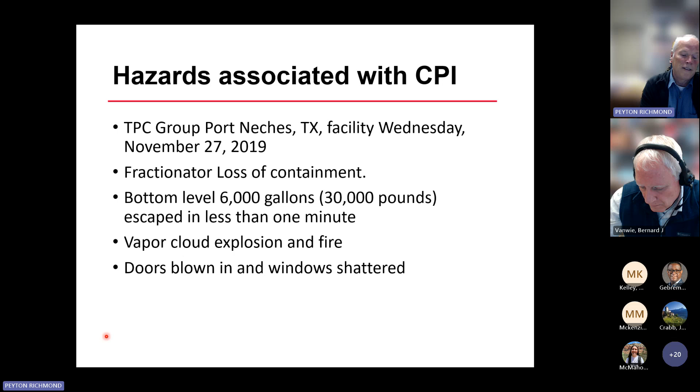That was about 30,000 pounds of 1,3-butadiene - to put that in perspective, that's like about 6,000 pounds of TNT. It vaporized and then exploded. This is not too far from people's houses and high schools and such, so you had doors blown in, windows shattered. When I talk to some people about cybersecurity, they think, 'Oh well, it's a chemical plant, just go close a valve.'

So I thought I'd show you some valves. This is from the Borger refinery. Number one, the question is, can you get to the valve? Do you know which valve you need to shut?

These are just small valves inside the boundary limits of the plant. But whenever you shut down a plant and you're trying to isolate it, you have to shut down the boundary limits valves. These are very large valves. When I was a younger man working as a control engineer, we were shutting down for a turnaround, and I went off with a group of 2 other operators to close one of these valves.

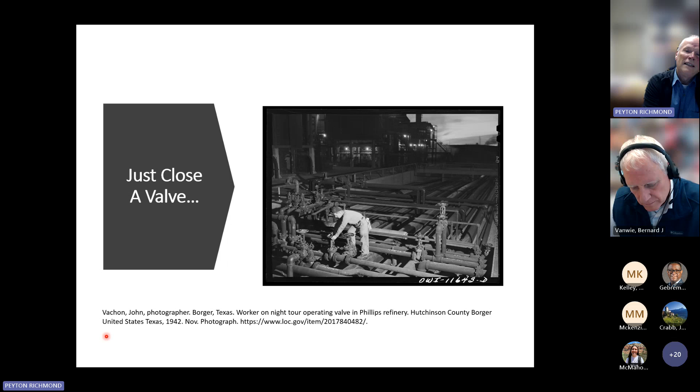So let me tell you, it is an exercise. It takes a significant amount of time and effort to shut these valves, that's assuming you can get to it. In the case of this incident, the piping was so heavily damaged by the explosion that you couldn't even shut the valve. The valves were not there, so you couldn't isolate it. And so the fire kept burning. It's not easy to put those things out.

Before it was over, you had another 2 additional explosions, 4 additional towers fell. All you try to do in those situations is try to contain it. I was evacuated. And you think about it, this happened on the night before Thanksgiving, so everyone in that community, we spent Thanksgiving Day in hotel rooms. And those fires burned for over a month. So that's a significant event there.

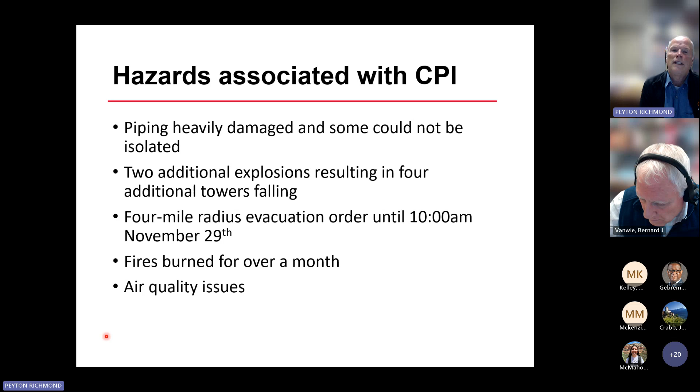And you also have the air quality issues because 1,3-butadiene is not very healthy.

So the hazards associated with CPI, just to summarize then, the worst thing that could happen is you have a loss of containment from the process equipment. And if that happens, then you have the vapor cloud explosion possibility, you have the fire that you can't put out, and then you have the toxic release.

One level down would be if you just have equipment damage, like a vessel or a compressor gets damaged or a furnace gets burned down. That's less likely to hurt someone, but it will shut down a plant for an extended period of time, 3 to 6 months. You're talking about millions and millions of dollars for these large facilities. And then probably the safest thing that could happen if you had an issue was just an unscheduled shutdown. But even that is going to cost you, just $30,000 just to shut down for a small unit even.

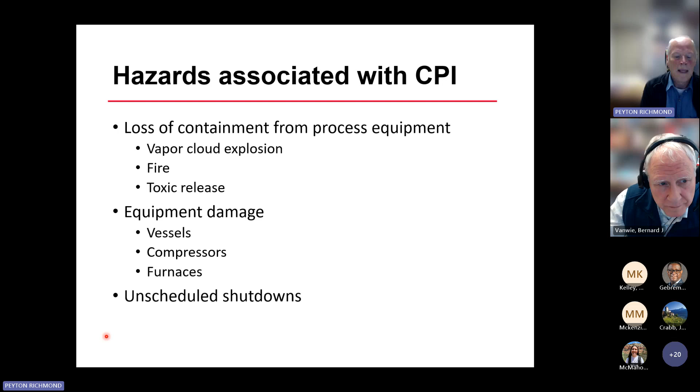So the traditional risk mitigation to try to take care of these problems, because number one, we found that a lot of the fatalities that occurred when these things happened were because you had people located inside the boundary limits of these units, was that we took all non-essential personnel and moved them outside the gates. That was certainly pushed by the insurance agencies to try to do that.

Example there, when I was at the Borger refinery in the 1990s, they cut over from all pneumatic instruments to this DCS and electronics, and they moved all of their control rooms. All their control rooms used to be right underneath the units. They moved all those control rooms outside, next to an old school, outside the gates.

And I say it was an old school because the history was that in 1980, that refinery had a big explosion, and that used to be the town of Phillips, Texas. It just demolished their industrial area and then demolished a lot of houses there. So Phillips 66 had to buy the land, permanently closed it for residency. So the school is the only thing left right there next to the control room, and they use it for office buildings now.

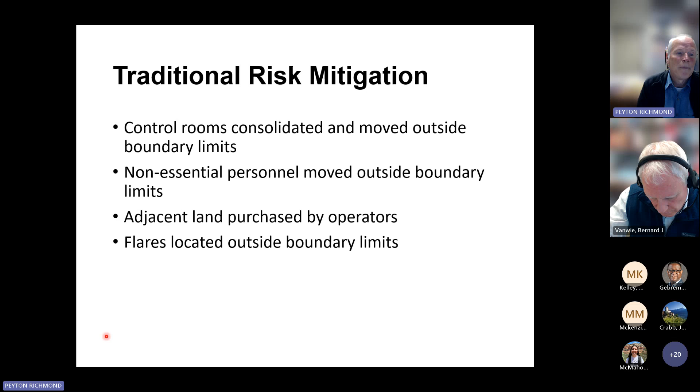So the other thing that happened when we tried to get a handle on this was the regulations came out for process safety management. Process safety management of highly hazardous chemicals includes a process hazard analysis as a requirement. It's one of the 14 items of the process safety management regulation.

For process hazard analysis, it's left more or less open, but the two primary tools in the industry I've been in, the big heavy industry, is hazard and operability studies, where you look at the piping and instrumentation diagram and try to figure out what are the potential hazards associated with that process. And then the layer of protection analysis, which is a technique to go from the hazard to what is the probability that it will occur and what mitigations we need to put in place.

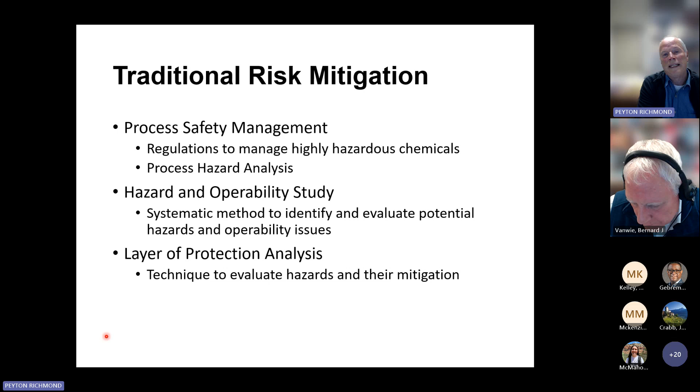Okay, so if you look at these mitigations, they're normally in this order. The first one is the basic process control system, that's a DCS system, which keeps the process under control. A small plant even will have hundreds of PID controllers. A PID controller is a control loop, so you'd have hundreds of variables controlled by hundreds of different control algorithms that keep the process in bounds.

And then if you have issues and you have to shut down, or if you need additional mitigation, you go to something called a safety instrumented system. That's a separate system that has shutdown systems, with instruments that it reads, and it says okay, if you're here, it's unsafe, and it'll shut the unit down.

And then above that, you'll have maybe active protection systems like deluge systems. And then after that, passive ones, where a passive protection would be like a dike around a tank in case it overflows. And then the final layer is the emergency response personnel.

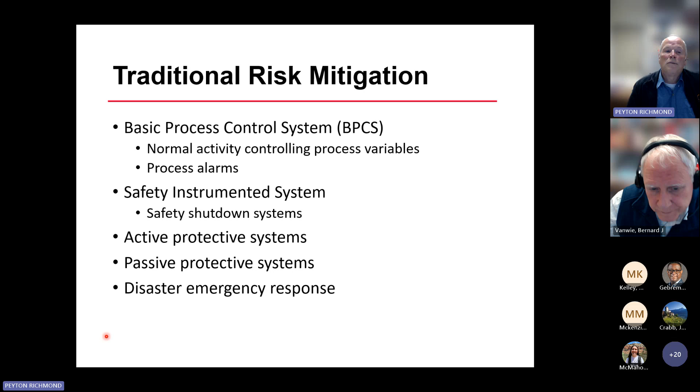So if you have a lot of chemical plants in your area, the fire department really can't go out there and try to put the fires out in a chemical plant. It takes the people that are grouped together from the plants themselves.

Now initially, like when I started, or when I went to the Borger refinery in the 90s, this was proprietary operating systems that they were using. Since then, Honeywell looked at that in particular and said, well, we can do a lot. It'd be a lot easier to get people to take care of it and develop this software if it was Windows. And I don't know, we heard they talked to our management as well and said we could do this with fewer people if it was Windows too, to be able to maintain it. And so that's where it went.

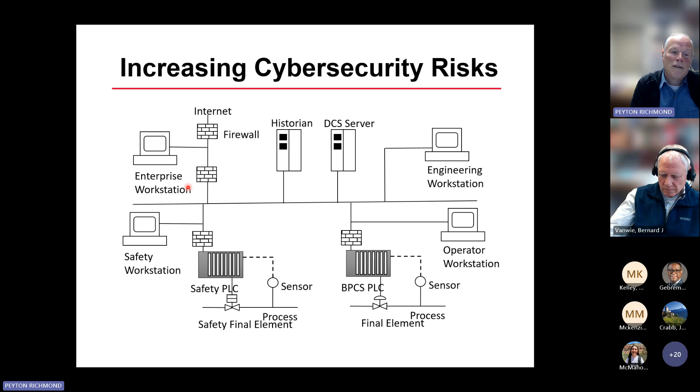All these workstations now and these servers operate off of Windows. So the modern infrastructure here has basically turned to Windows. Now, not the PLCs, not the actual hardware, but the servers part of it, it's all Windows.

And Windows is not something that you can use corporate IT to support. That I know from experience. You have to have special groups associated with operations, because you think of IT, you're thinking of 9 to 5 jobs, and this is not a 9 to 5 job. This is a 24/7 operation.

So the operators typically rely on the control engineers for that support, and control engineers are chemical engineers. Chemical engineers make the best control engineers in chemical processes, I'll put it that way. It's easier to teach a chemical engineer the control side than it is to teach a control engineer chemical engineering.

But for these systems, availability is prioritized over security, because you need access to that DCS 24/7. If you lose access to it and you can't control your process, and it goes out of control, that's just as bad as somebody taking it out of control for you. Availability is more important than the security at that point.

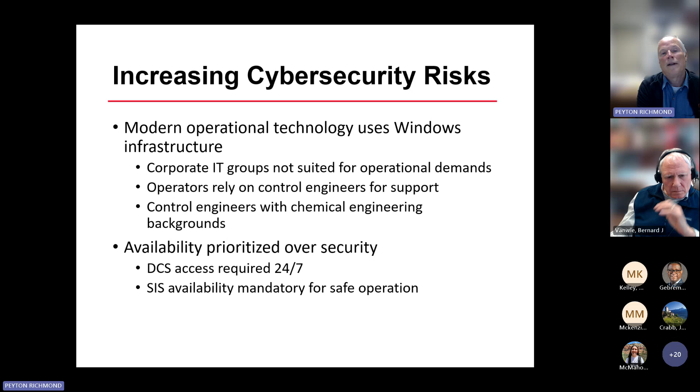But what's happened in recent years was some of these things like Stuxnet. You probably heard about where they damaged a lot of rotating equipment in Iran, and the reason that was interesting is because that was a completely air-gapped system, there's no way in or out of that system. And the way they got in there was they somehow distributed some USB keys, and someone picked those up and plugged them into the computers, and that's how the software was delivered, apparently.

And for that reason, I can tell you, ExxonMobil, which is across the street from us, they don't allow USB keys of any sort in their entire facility, I think, because of that reason.

We have a lot of rotating equipment in the chemical process industries too, and it's very sensitive to RPMs. If you run it at a critical RPM, the vibrations will increase, and it has positive feedback, so it'll destroy the machine. You have a PLC set up not to do that, and Stuxnet went and overwrote that machine, making it damage them on purpose.

Triton was interesting because they attacked a Triconex system, which we use a lot for safety instrumented systems in chemical processing industries. That was a watershed event, a real eye opener, because if they can get into a Triconex system and shut down your safety instrumented system, you're basically unprotected and unmitigated. Also, since all these systems are Windows based, any zero-day vulnerability can be used to attack a CPI operating technology system.

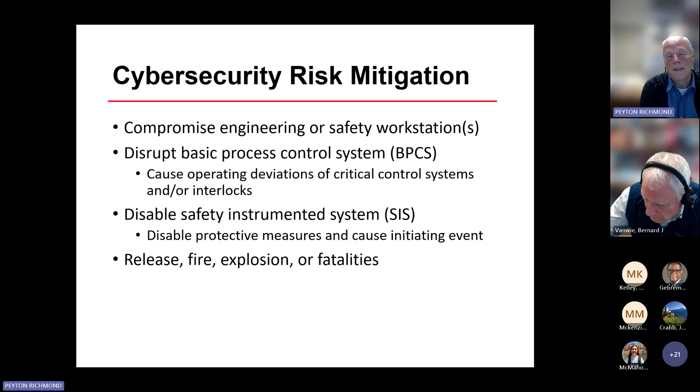So we need to think about building awareness among the people who operate the plants, and some companies do that. I know that ExxonMobil has some of those programs.

I had a brother that worked there, but we also are trying to promote awareness with the chemical engineers at Lamar University with our unit operations laboratory. So in our unit operations laboratory, we have an industrial DCS.

We have 3 experiments, and then we've got one group that acts as a process control group. They try to understand what are the control structures involved. Once they've done that, and I've given them a tour, they do a simulated cyber attack, and we see if the other groups can figure out if they're being attacked, because there are a lot of false positives if you're working on a new system. Are they being attacked? And if they figure out they're being attacked, then you have to ask what exactly are they doing?

That's the key. I'll let them interrupt the other groups for just 5 minutes, and if the other group doesn't figure it out in 5 minutes, then they have to let them go. So we've got a flow experiment, a level experiment, and a temperature experiment.

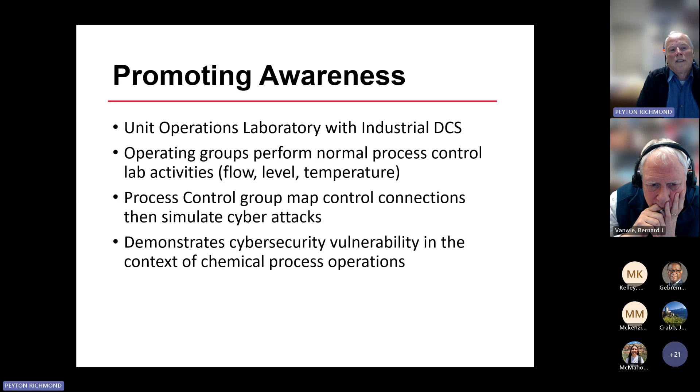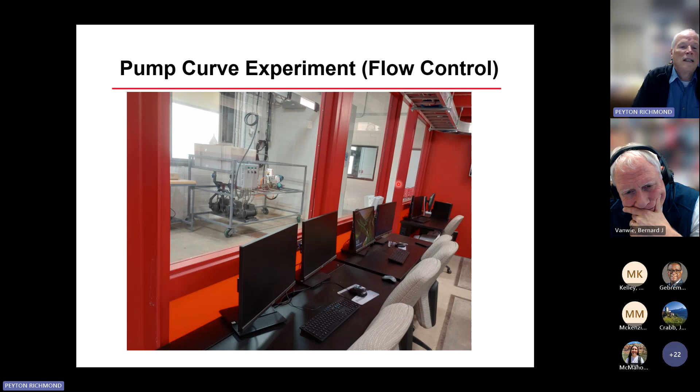Their job is to operate that unit and get their data off of it. So they'll line up, meaning they open the appropriate valves, then they'll operate the pumps at different impeller sizes, and then they'll try to tune their PID control loops.

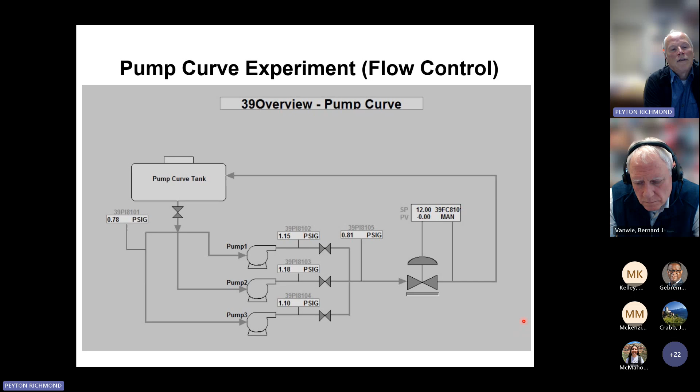Okay, so that's what it looks like from that end when the group's doing the experiment. The process control group then goes through, and they have access to the same tags, so they'll identify the tags with the experiment, and their job is to diagram them into complete control diagrams. They'll review the additional parameters and then decide how they want to attack it, and they'll simulate attacks and force the operating group to detect it and respond to it.

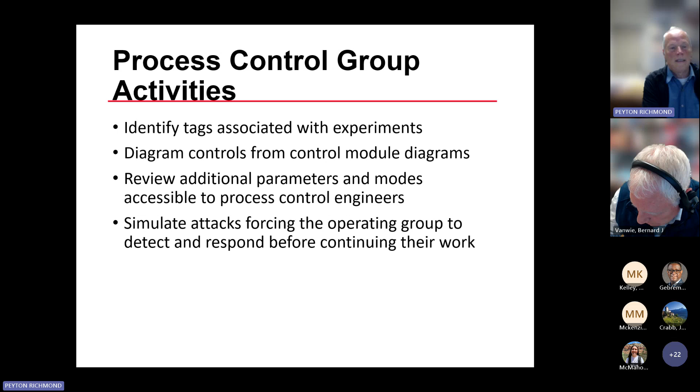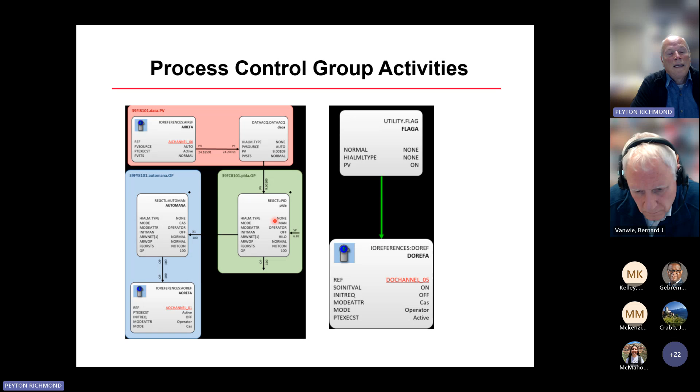And then there's a lot of configuration things in a PID controller. So one of the things you could do, for example, is just inactivate the whole control module.

That's fairly easy to do, and then it would just stop working. You can place components in manual, individual components in that control module in manual. If you have that kind of access, it would be easy to misconfigure the PID controllers. You can change the output limits to where the output only goes up to 30%.

The valve won't open any higher. Like I said, you could change the control action from direct to reverse or vice versa. And what that would mean would be the controller would try to make a change in exactly the wrong direction. So if you did that, the controller would have to be shut off and running manually. It'd be pretty useless. It would not hold control.

And of course, you can disable digital outputs, you can spoof inputs. You can put things in manual and spoof inputs. So those are the options I gave the control group.

Some of the things they did was they seemed to like to shut down the pump while the other group was operating it. They also, one of them manipulated a temperature reading, and it took a while. So if you make a temperature read something other than what is coming in from the thermocouple, then the process control is not going to work.

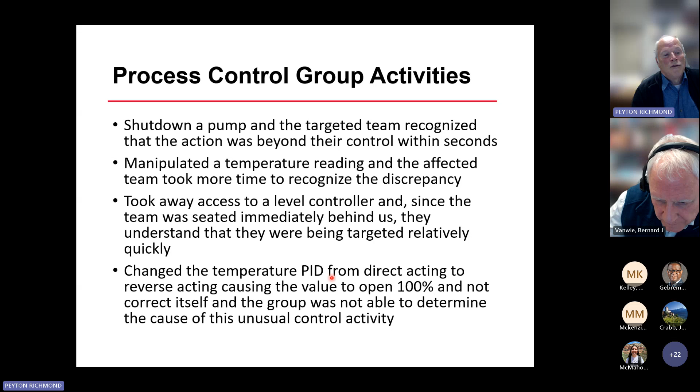So some of the other things is they changed an interlock on a pump. So we have a level control pump where I don't want them to ruin the pump. And so there's an interlock with a low level. And so they just turned that interlock on and the pump turned off and the group couldn't turn it back on.

Another one changed the high limit output to 60% for the level controller, which means they couldn't control the level anymore.

So these are some things that you could do, if you had engineering access in an actual plant. Now, none of these things are really going to cause an explosion, typically. I would say most of them would just cause the unit to shut down. That would be bad enough.

But it's some of these things that you're doing here, if you're a control engineer and you make changes, that's one thing. But if you're someone else and you have that access and you make changes, and let's say it's in the middle of the night and all you have are operators there, they have no idea how to change it back. Okay, and if you make enough changes, even a control engineer will be swamped.

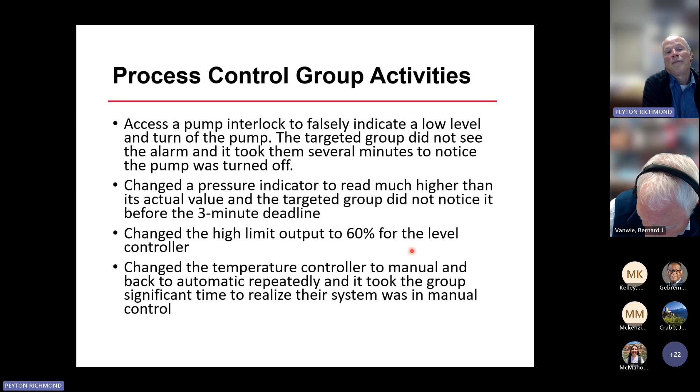And for that matter, there are some facilities where there's not even control engineers there. They come from some central location. Most of the time, they're not even assigned.

So in conclusion here, we talked about the hazards associated with the CPI, the explosion, the fire, the toxic release risks. And then traditional risk mitigation includes the distributed control systems and the safety instrumented systems. And those are now Windows-based systems. And so they're more susceptible to attack.

And so the chemical process security, cybersecurity risks are increasing. And operational technology for hacking tools, you know how that works. It's once you develop a library of hacks, you can use it over and over again. Those things just get better and better, or worse and worse.

And we talked about cybersecurity risk mitigation, and you put it in the context of process hazard analysis. And then what we're doing here is we're trying to promote awareness with the undergraduate process control laboratory module.

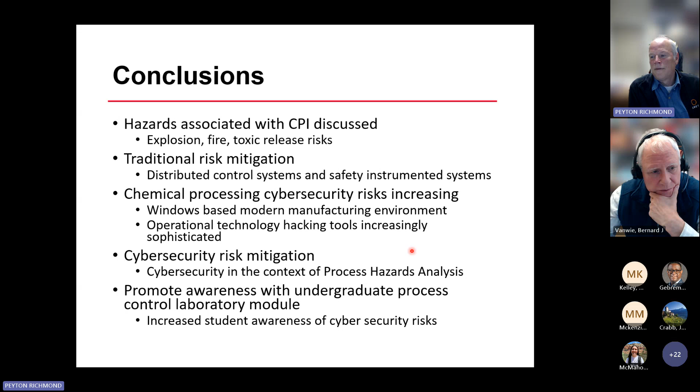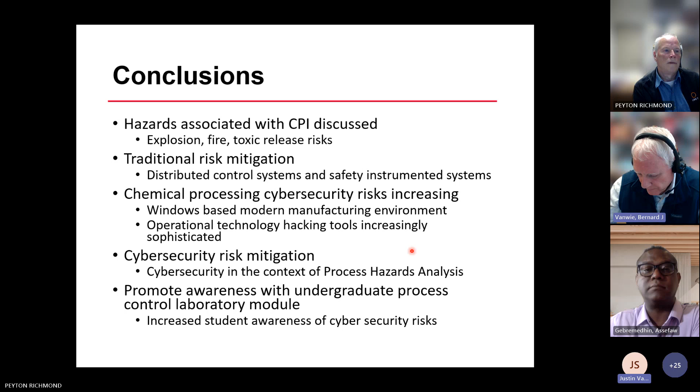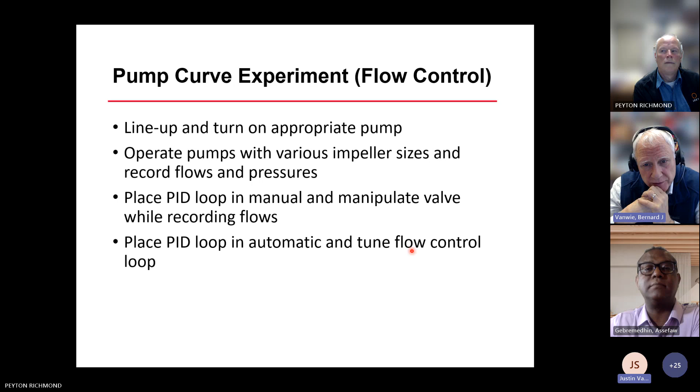So I'll ask a question. I've got several here, but, how can these, let's say they have a group of hacks or an array of hacks. Are there ways where you can develop an array of detection mechanisms so that you can detect the hack and fix it kind of automatically?

I've seen papers talking about using model predictive controllers to try to identify where the process is not behaving as it should. I could see that maybe detecting if someone was trying to change a value, but in general, it's just if someone is, most of these measurements, like in the safety instrumented systems, are not used at all in process control, and so you're not going to be able to detect them that way.

And so the number of things that you could do to the system are just limitless, really. I think the real thing that's standing in the way of this being easy to do is the fact that every chemical process unit is unique. They're all unique. They're all extremely complicated. And so it would almost take someone who was familiar with that system to do anything, to even figure out what unit or what piece of equipment to attack.